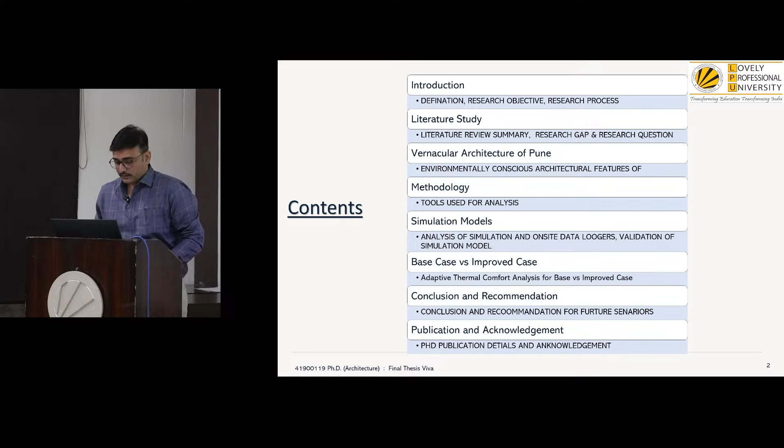Topic for the introduction: India had about 31% of population living in urban areas in 2010, and by 2050 that percentage is projected to rise up to 50%, adding 441 million more people to the urban population. At the same time, the demand for housing is also growing simultaneously, making it necessary to think about the housing strategies needed.

Pune, located in Maharashtra, is also facing rising temperatures. An article published by The Hindu, 'Climate change is already making India hotter', states that from 1950 to 1990 the temperature rise observed was about 0.39 to 0.52 degrees Celsius, raising serious concern. A report published by TERI, The Energy and Resources Institute, in 2014 stated that by 2030 the rising temperature will be 1 to 1.7 degrees Celsius, and it will go up to 3 degrees Celsius by 2070.

Considering that, and also observing that Maharashtra is facing housing demand, it is the need of the hour to study passive design strategies, which makes this study more reliable for further investigation. For investigation, we studied the Pune climatic zone.

Considering Köppen's climatic classification, Pune stands with the tropical savanna climate, categorized with hot summers, distinct monsoon seasons, and mild dry winters. In summer, the temperature ranges up to 37 degrees Celsius with humidity 36 to 50%. In monsoon, temperature varies from 24 to 30 degrees Celsius, with humidity high up to 82%. In winter, average temperature is about 21 to 25 degrees Celsius with moderate humidity.

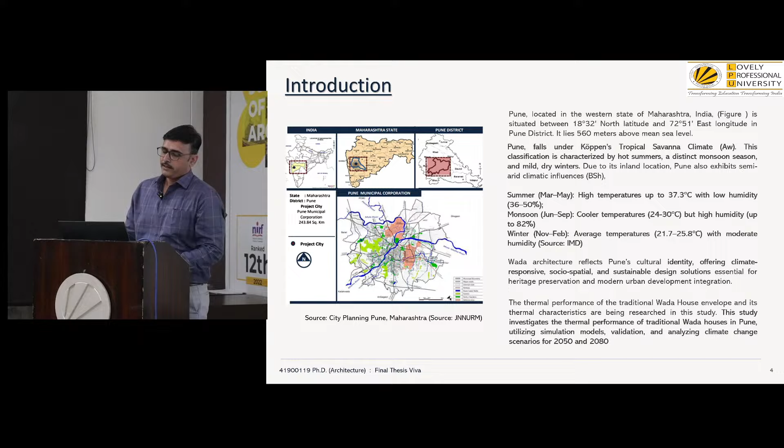Research flow: research started with the research design with seasonal climate variations to understand rising temperatures in the region. The literature studied covers main topics like thermal characteristics, climate change resilience, and future climate change scenarios.

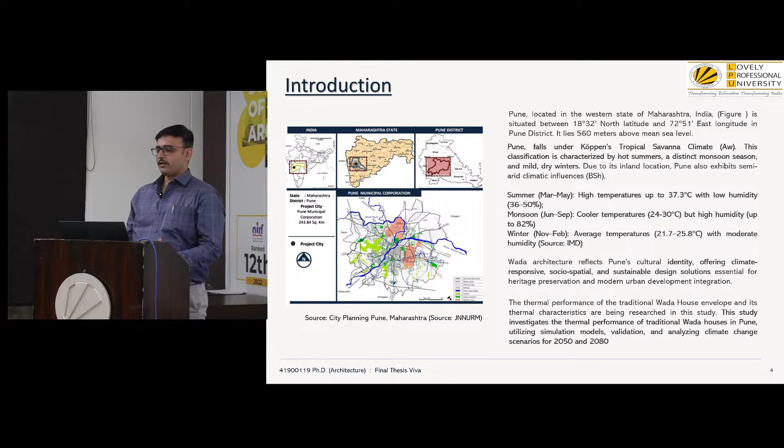On this basis, we framed our research questions, research objectives, and scope and limitations. We investigated the vernacular architecture forms of Pune region with respect to passive design strategies, Wada layouts, case studies, and sample size selection. For research methodology, it is divided into three categories.

First, to identify the rising temperature of Pune, then to relate it with the vernacular house form. Second, for validation of the simulation, we installed data loggers to understand real-time scenarios in the Wadas. Third, utilizing climate change scenarios developed by the Intergovernmental Panel on Climate Change, we described future weather scenarios for 2050 and 2080, through which we did the improved case simulation models.

Result analysis: with the rising temperature, we studied the 30-year temperature variation using IMD weather data. Second, weather simulations for the base case, which we validated with ASHRAE guidelines. Then future simulations to understand future scenarios of these buildings and propose new strategies based on the improved case model. On this basis, we derived the conclusion and recommendations.

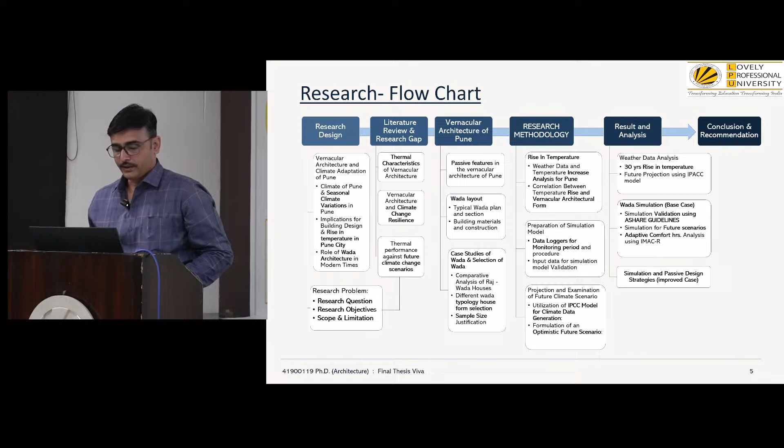Literature review and the research gap. For literature review, we mainly focus on thermal characteristics of vernacular architecture, climate responsive vernacular architecture as bioclimatic design and its resilience to climate change, and thermal performance in future climate change scenarios.

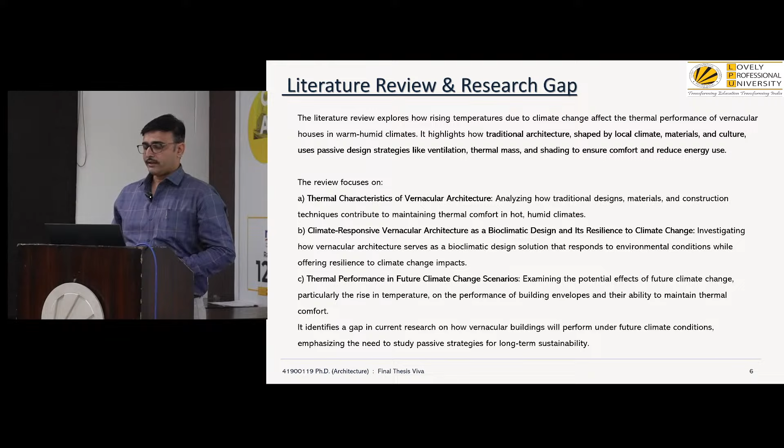In category one, thermal characteristics, we discuss quantitative simulation analytics, qualitative and comparative design. We found that despite a 12-degree outdoor temperature fluctuation, the indoor stayed between 26 to 30 degrees Celsius. The courtyard was 5 degrees cooler than outside, indoor and relative humidity remained stable.

Second, an important finding from user surveys: occupants in traditional homes reported greater thermal comfort, with temperature readings showing 2 to 3 degrees Celsius higher comfort than modern buildings.

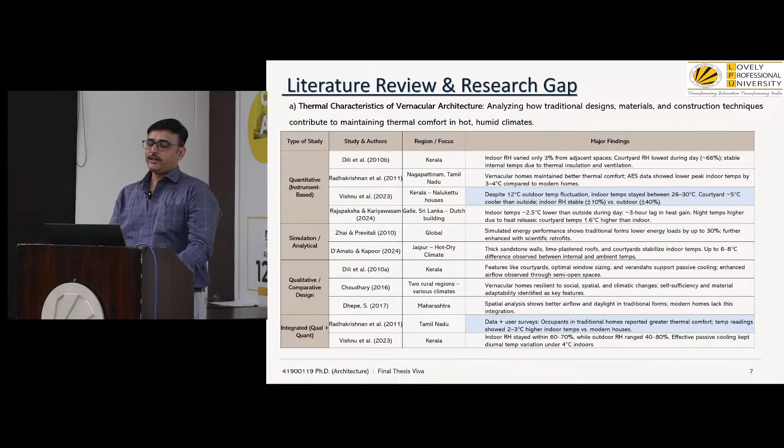Second, climate responsive vernacular architecture as a bioclimatic design and its resilience to climate change. We observed that mud walls with thatch roof show high energy efficiency, high thermal mass, and ventilation enhanced comfort. Passive solar heating and thermal mass regulate temperature. Vernacular forms efficiently use natural resources year around.

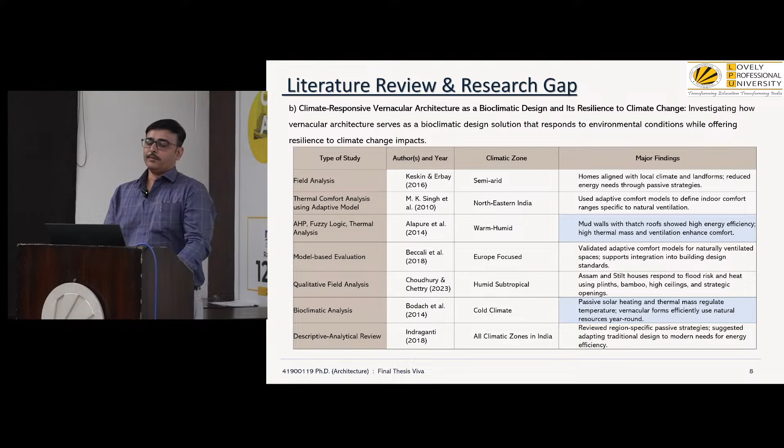Third, thermal performance in future climate change scenarios. We observed climate change scenarios for different zones like Pune, Hong Kong, China, and Ahmedabad, where remote sensing and urban heating analysis was done for Pune only, stating that from 1990 to 2019, the built-up area increased by 43%. Summer land surface temperature increased by 5.8%, and a 12.4 urban-rural land surface temperature gap was identified.

Now, based on the field investigation, author Khadija stated that vernacular homes maintain 23 to 31 degree indoor temperatures across climate zones, outperforming RCC homes in future scenarios as well. High thermal mass plus a controlled heat flow system raises indoor air temperature passively, with no mechanical heating required. And finally, cooling hours account for 60% of the heating period, and 33% under high greenhouse emission scenarios.

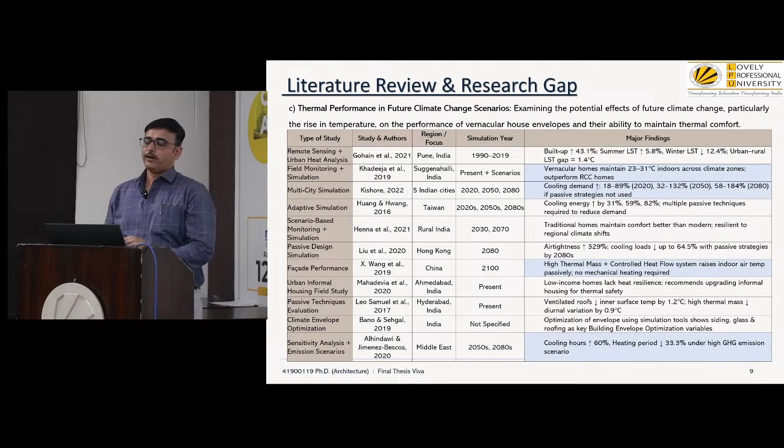When we got a review from the expert, it was stated that we have to discuss one more category: what are the different climate zone scenarios in the vernacular architecture of Indian context. So we have discussed this with the help of different zones.

What are the different passive strategies and major findings? I am covering the important ones. Dili, discussing the tropical climate of Kerala, it shows that courtyard, shaded veranda, and pitch roof give a 3 to 4 degrees Celsius reduction in indoor temperature compared to outdoor, while also maintaining indoor humidity. Rajapaksha, in her paper, says that high thermal mass walls with night ventilation give 2.5 degrees below outdoor temperatures and heat retention at night.

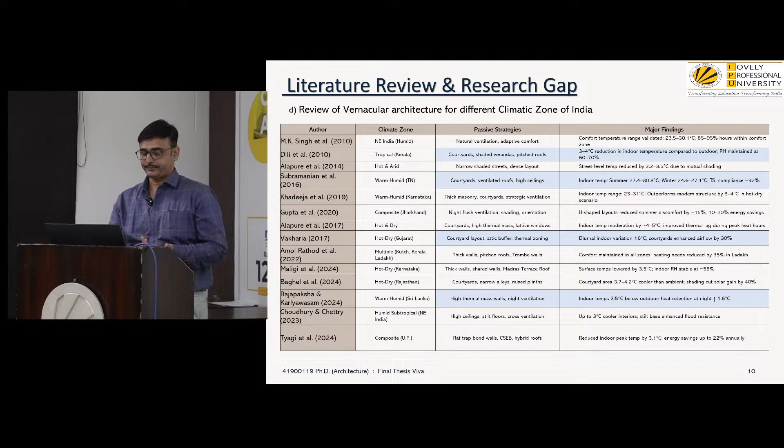Now, the research gap. While existing research mainly discusses climate responsive strategies, energy optimization, climate resilient housing, and vernacular architecture, the existing studies on warm humid vernacular houses do not address the impact of climate change and temperature rise on Pune's architecture. Climate change and rising temperature challenge the resilience of vernacular architecture, while Wada houses in Pune have traditionally offered thermal comfort through passive design. Their future effectiveness is uncertain.

This study assesses the performance under projected climate scenarios for 2050 and 2080 to identify vulnerabilities and proposes adaptive strategies. The aim is to derive insights from vernacular design that can inform modern architecture by bridging traditional wisdom with contemporary needs. The research will also offer recommendations for climate resilient, energy efficient buildings.

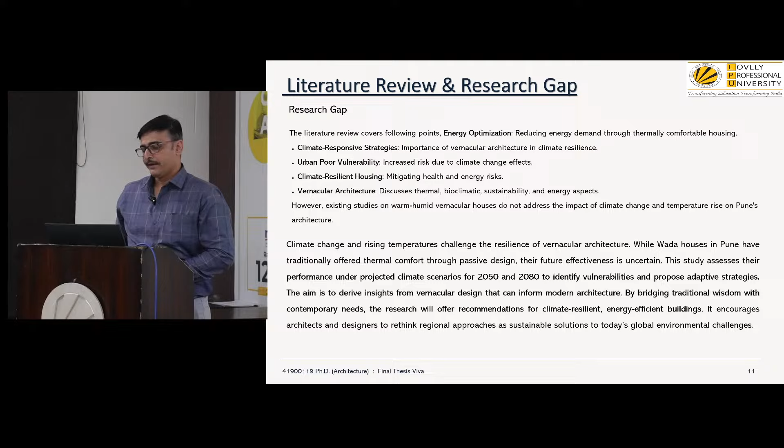Based on the gap, we frame the research question: what are the implications of rising temperature on the vernacular house form of the Pune region? The objectives are to analyze the nature of climate change and its impact on vernacular architecture for future scenarios considering rising temperature in Pune; to assess and compare the thermal performance of traditional Wada houses and their improved climate responsive strategies through simulation under future climatic scenarios; and third, to develop practical guidelines for modifying the Vadas to improve thermal comfort while preserving their traditional architectural character.

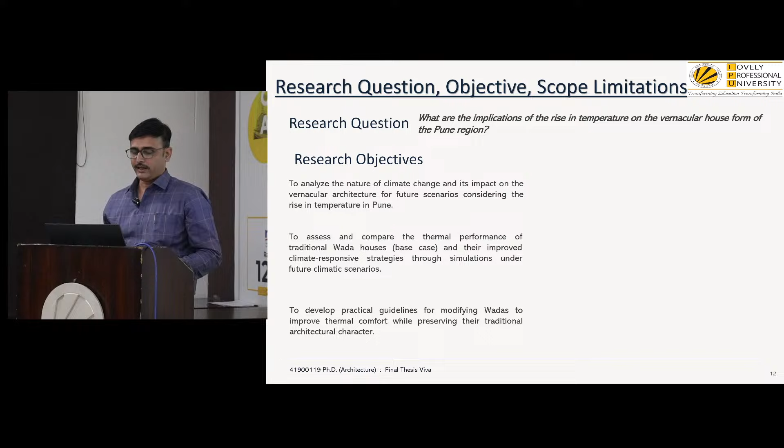Scope and limitations: the study mainly focuses on analyzing the thermal characteristics of a Vada house envelope in Pune's climate context and evaluating the effectiveness of passive design features in maintaining thermal comfort. The assessment is done for the impact of future climate scenarios for 2050 and 2080 on Vada houses with respect to rising temperature. The limitations are that the study is limited to thermal performance of Vada architecture only, excluding urban variables, and for rising temperature, the data used is based on IMD weather data only.

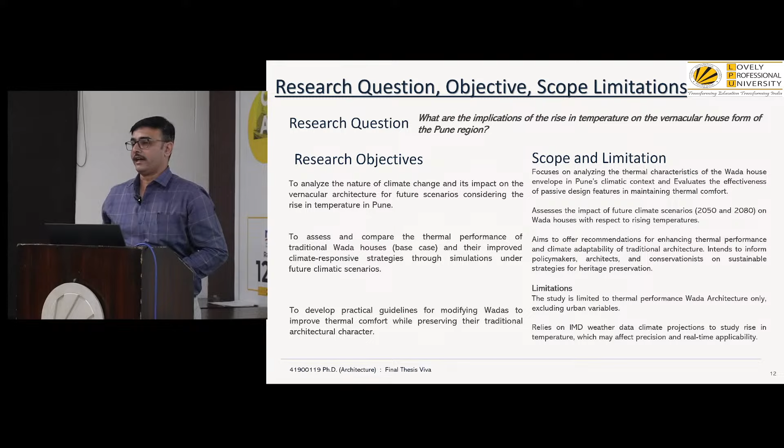Now, vernacular architecture of Pune. The vernacular architecture of Pune, mainly called Wada, is derived from the Sanskrit word Vata, meaning a plot of land or a piece of land. There are two types of Vada: one with two courtyards, one with a front yard or rear yard, and one at the center. The Vada typologies are mainly discussed when we identify which type of Vada we are dealing with. The Wada with two courtyards, the Rajwada, is the type mainly found in frontal areas.

In frontal areas, we observe public and semi-public activities, whereas in a rear yard we can observe activity for the family, which is restricted to family members only.

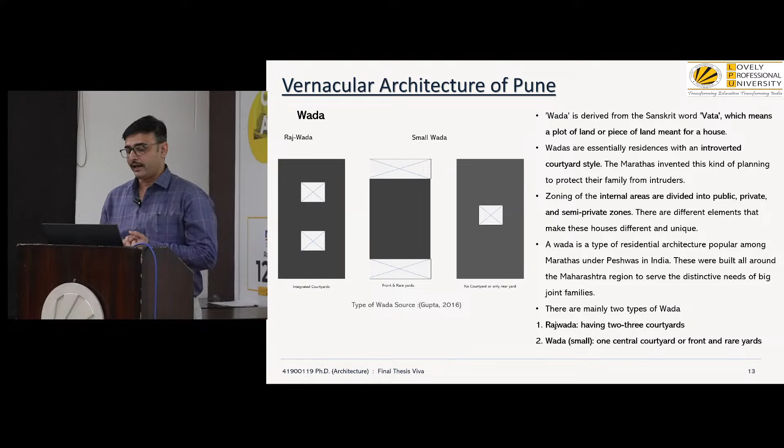The courtyard, which was introvertly designed, has the main source of light and ventilation for these Vadas, because these Vadas were mainly designed to defend themselves when intruders attacked, a philosophy developed during the Mughal and Maratha periods. The main characteristics are courtyards with verandas, terraces, attic spaces, and thicker wall sections which provide thermal mass.

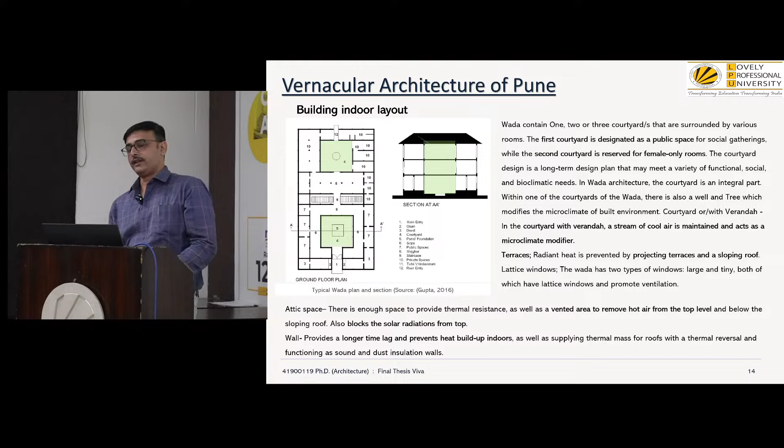Based on this, for the finalization of Rajvadas, we first selected 5 Rajvadas: Vishrambag Vada, Ranade Vada, Chafekar Vada, Nagarkar Vada, and Thakur Vada.

We defined the orientation, structure, plan form, construction type, number of floors, passive design strategies, and types of doors and windows. We also discussed floor and roof forms, front elevations, and whether renovation was done, because we need the originality of the form when analyzing these structures, along with courtyard proportions and the built-up area.

On this basis, we selected the Ranade Vada for further analysis. It was selected because no renovation has been done in this particular Vada. At the same time, this Vada has been occupied by the same occupants for the last 30 years, so it functions as a house form while maintaining the characteristics of the vernacular form.

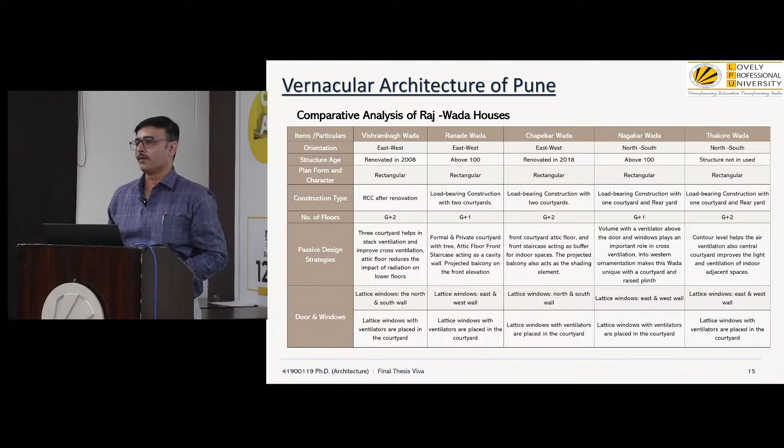While dealing with one typology of Vadas, we thought we should add 2 more smaller Vadas to have a comparative analysis of all 3, making this study more reliable. When we discussed this with experts, their comment was that we can't say how Vadas are performing with just one example — you need different Vada scales.

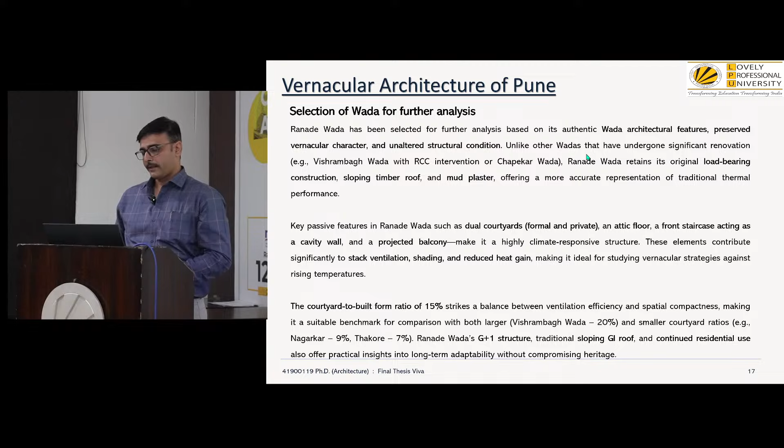Ranade Vada has 2 courtyards; it's a G+1 structure with an attic. Purandar Vada is a small Vada with a rear yard and front yard with attic space. Gokhale Vada doesn't have any front yard, instead having a front access and a rear yard. This is the only G+2 structure that we found.

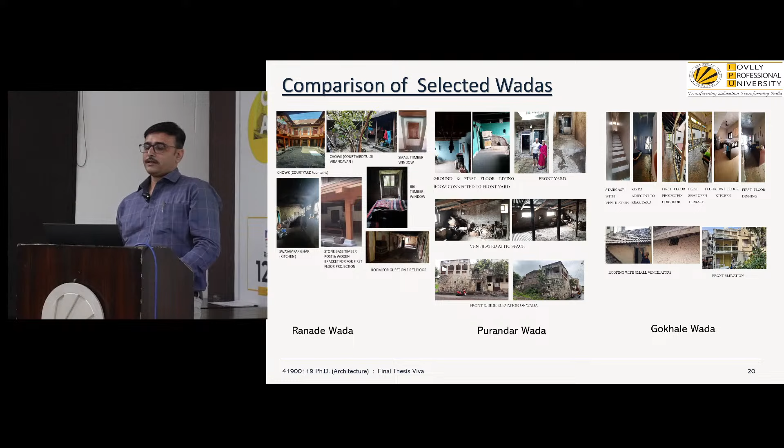While studying in detail, we found that all these Vadas are 100+ years old, maintaining the vernacular character with no change. All three Vadas are load-bearing structures with the typical characteristics of the Vada — lattice windows, roof form, and most importantly, projected balconies.

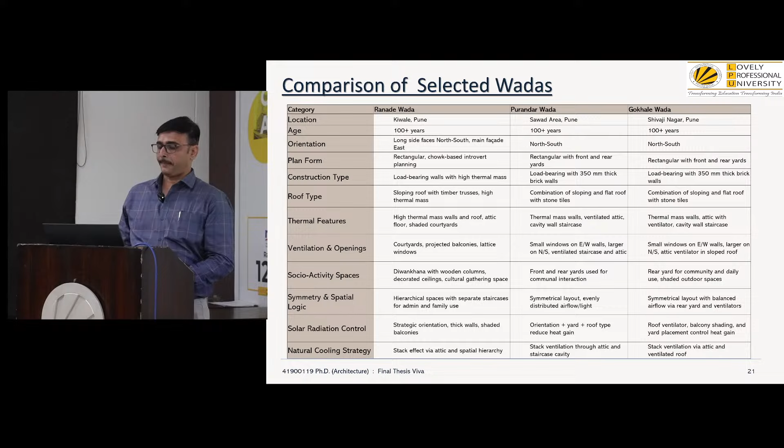To justify the sample size, we found that all three Vadas have the main characteristics of the Vada, standing with vernacular details. By analyzing multiple case studies with similar yet distinct features, the research ensures triangulation, enhancing the validity and reliability of the findings.

The sample size is also justified by the need to evaluate both existing base case and improved case scenarios. To add more contrasting character, two more Vadas, Purandar and Gokhale Vada, were added to make this study more impactful.

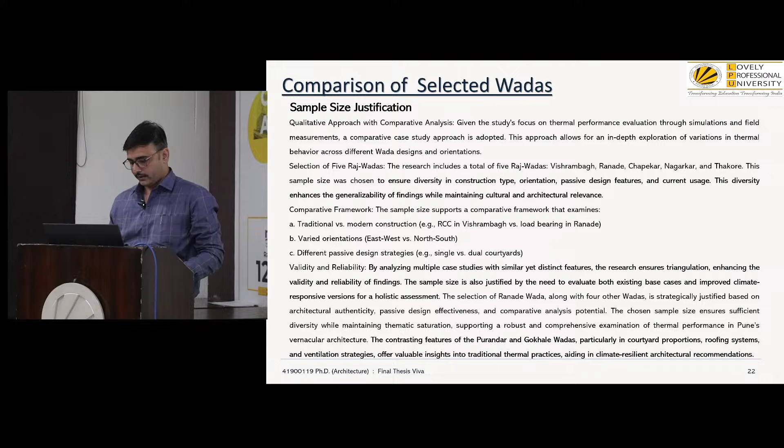Research methodology: we started with the different steps we had to perform to achieve objective 1, objective 2, and objective 3.

In objective 1, we started with a literature review, then visited various vernacular sites in Pune to identify the vernacular Vada house forms and their selection criteria.

We also needed to understand the rising temperature in the current quarters, so we visited the IMD weather department to get data for minimum and maximum monthly temperature ranges, to identify the thermal temperature variation. We then discussed bioclimatic analysis using Climate Consultant to understand the key strategies important for going further.

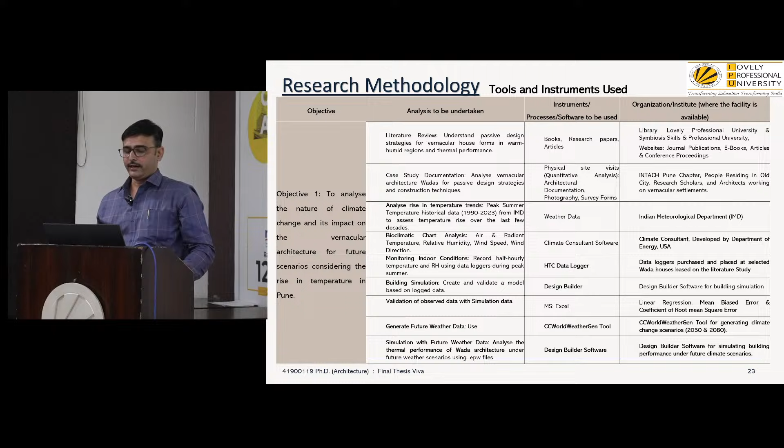Then, for a simulation model, we placed data loggers in all three Vadas to understand real-time scenarios, and validated these models with ASHRAE guidelines. We then generated future weather data with the help of a climate model developed by the Intergovernmental Panel on Climate Change, and finally performed the analysis for this case.

Under objective 2, we mainly discussed improved strategies with the Climate Consultant tool, and incorporated these guidelines into the simulation model to develop the improved case.

For objective 3, we proposed recommendations for what retrofitting strategies should be adopted for this particular house.

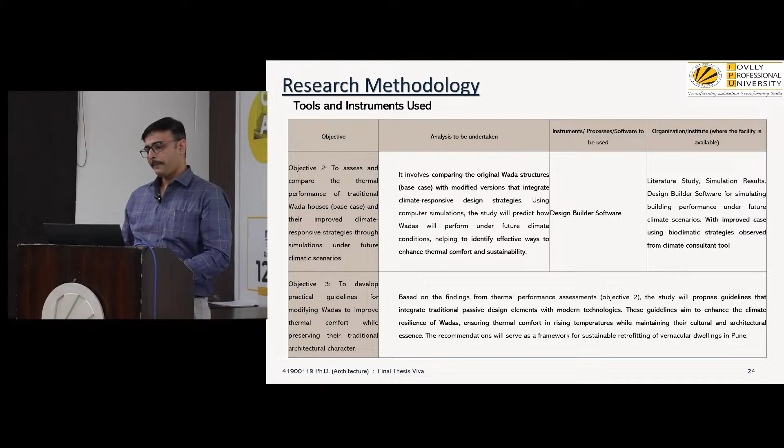Step 1: study with the rising temperature. For this, we have gone through 30 years of data from the 1990s to 2023, where we have discussed the peak summer temperature, average summer temperature, and the overall temperature ranges. We have found that there is an increase in temperature, which states that by 2023 the rising temperature is around 1.5 degrees Celsius. This is also discussed by various studies which stated that by 2013 to 2014 there is a rising temperature.

So we have understood there is a rising temperature and we need to go for those ideas for the climate change scenarios. Now, for the future climate change scenarios, we have created weather data files with the help of an Excel-based tool. This Excel-based tool is generated by IPCC HadCM3 models. In the figure, you can see this tool.

This is a CCWorldWeatherGen tool where we have to place the actual weather data file, and we have to give the climate change scenarios based on the IPCC. So we have given the scenarios, and through morphing we have generated the weather data file for 2050 and 2080. For 2050 and 2080 we got readings for the outdoor dry bulb temperature, minimum and maximum monthly temperatures, and the monthly minimum temperature in degrees Celsius.

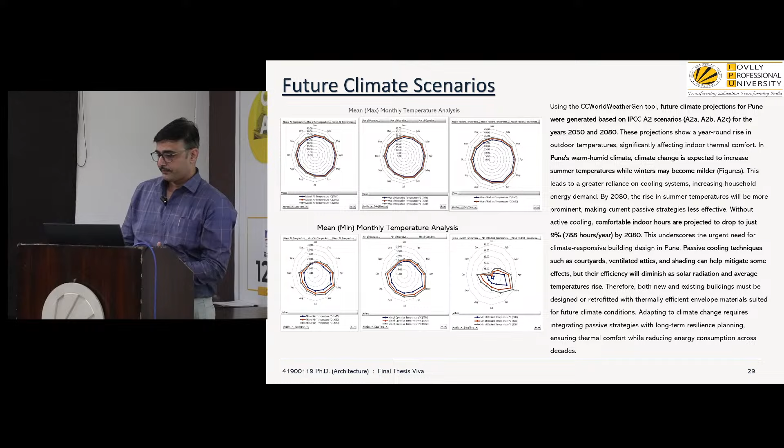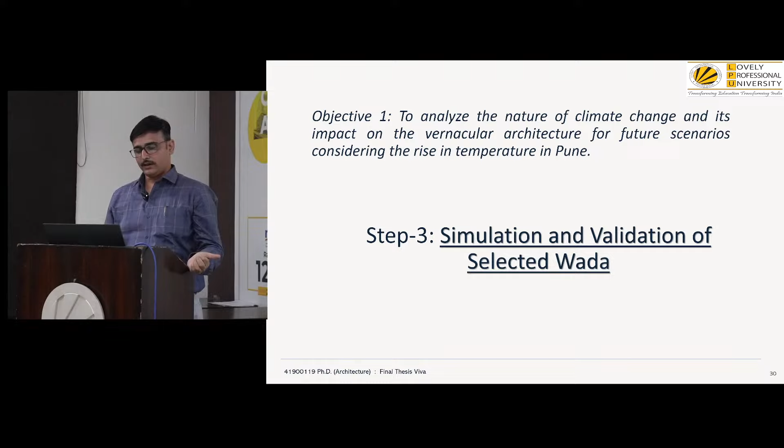Now, step 3: simulation and validation for the selected Wada. We have placed STC data loggers in all 3 house forms. The data recordings are done for the Ranade Wada from April 22 to March 23, whereas the readings for Gokhale Wada and Purandar Wada were done for 1 week. For Gokhale Wada, 25th Jan to 2nd of Feb, and 5th of Feb to 14th of Feb.

So we measure the half-hourly air temperature and humidity. These are some of the readings which we got for the Ranade Wada. The Ranade Wada reading says that the indoor temperature is very aligned with the outdoor temperature, but with very minimum variations.

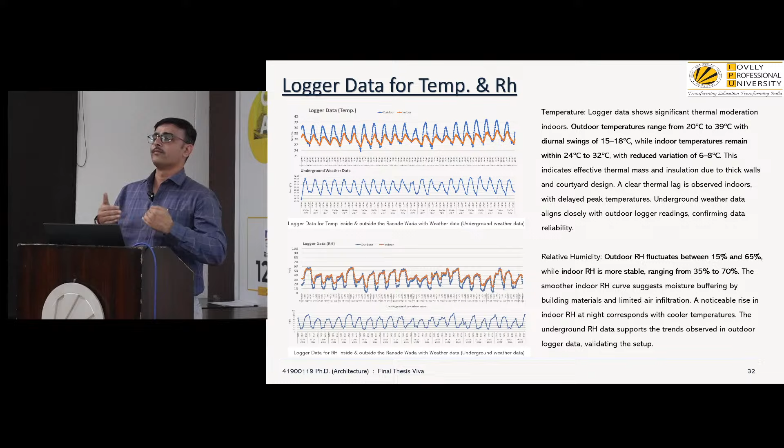The outdoor temperature which we have observed has a 15 to 18 degree swing, but at the same time indoor has only 6 to 8 degrees. Humidity is also a kind of factor we have observed that doesn't have that kind of impact on the Wadas. But at the same time, the data also matches with the Underground weather data. So we have identified that the temperature and humidity which we got from the data loggers are very much syncing with the outdoor weather data which we are getting through underground.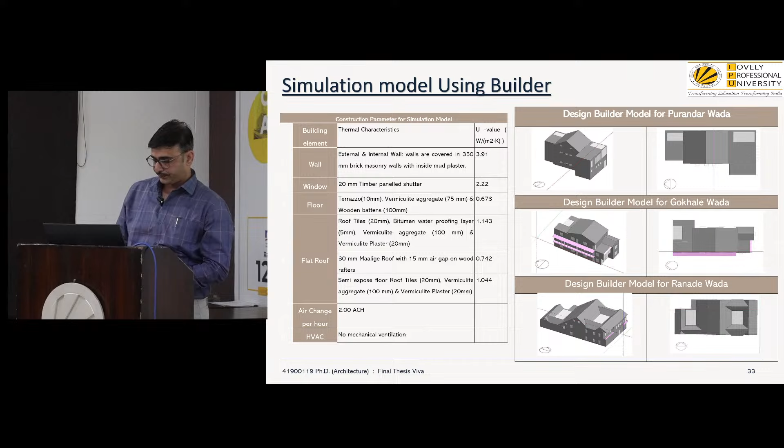Now, for the simulation validation, we have discussed the ASHRAE guidelines, where we have 2 types of errors to find out. One is the mean bias error, and second is the coefficient of variation of the root mean square error. In ASHRAE, it gives a clear idea: if you are doing monthly calibration, the mean bias error should be plus minus 5%, and if hourly calibration, it should be 10. For the coefficient of variation root mean square error, it should be 15 for monthly and 30 for hourly.

So on the basis of this, we have observed the data for the Ranade Wada for the whole year. We can easily see both conditions are being met, and this model is fit for further studies.

At the same time, we have also observed the mean bias error is around 4.3%, and the CV RMSE is around 11.76%, which is also lying within the range of ASHRAE. Because when we consider hourly data, both models are fit for further studies.

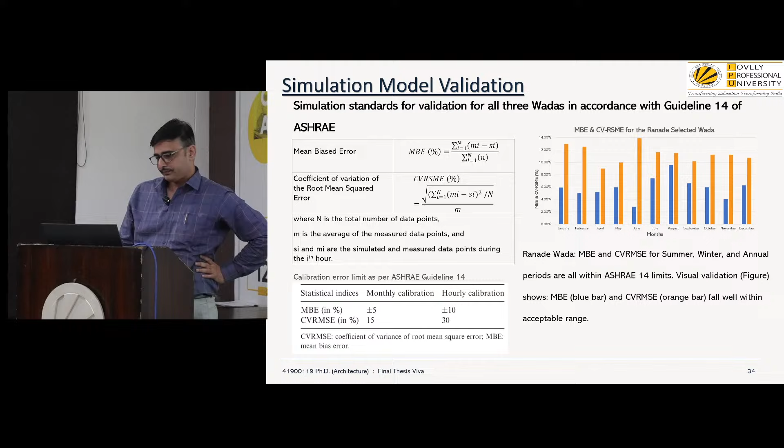Now, step 4, we are going for the further detailed analysis for all these 3 Wadas. First is the Purandar Wada.

The ground floor during peak summer, indoor temperature reaches a maximum up to 35 to 37 degrees Celsius, while in winter it drops to 15 to 17 degrees Celsius. Whereas the upper floor, the maximum temperature, particularly in the attic, reaches up to 37 to 39 degrees Celsius in peak summer, while other rooms experience a slightly lower temperature, in the range of 34 to 37 degrees Celsius.

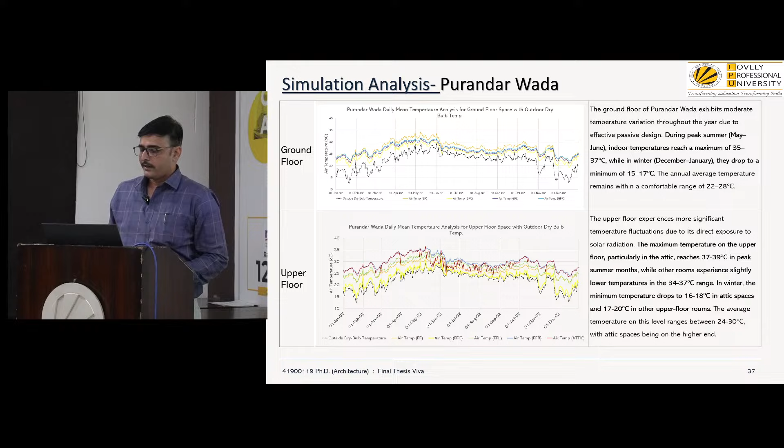In the winter, the minimum temperature observed is 16 to 18 degrees Celsius. For the Gokhale Wada, the ground floor reaches approximately 34 to 36 degrees Celsius, while in winter it goes to 15 to 17 degrees Celsius. For the upper floors, 36 to 38 degrees Celsius, and for winters it's 17 to 20 degrees Celsius.

For Ranade Wada, it's approximately 35 to 37 degrees for the ground floor in summer and 15 to 17 in winter. For upper floors, it goes from 36 to 39 degrees Celsius, and for winter it's 16 to 18 degrees Celsius.

So by analyzing all these things, we can easily state that ground floor maximum temperature is in a range from 35 to 37 degrees Celsius, whereas ground floor minimum temperature we can say is 15 to 17 degrees Celsius.

Ground floor observations for Purandar Wada show moderate variation due to passive design. Thermally, the ground floor is more stable than upper floors for the Gokhale Vada, and the Ranade Vada is more stable due to two courtyards and effective ventilation. For upper floors, due to the attic, it goes to 24 to 30 degrees Celsius average temperature for all three cases.

For the upper floor remarks, there are significant fluctuations due to the attic floors. Considering this, the courtyard effect is significant, particularly in Ranade Wada, where two courtyards enhance air circulation, reducing indoor temperature by 3 to 4 degrees Celsius.

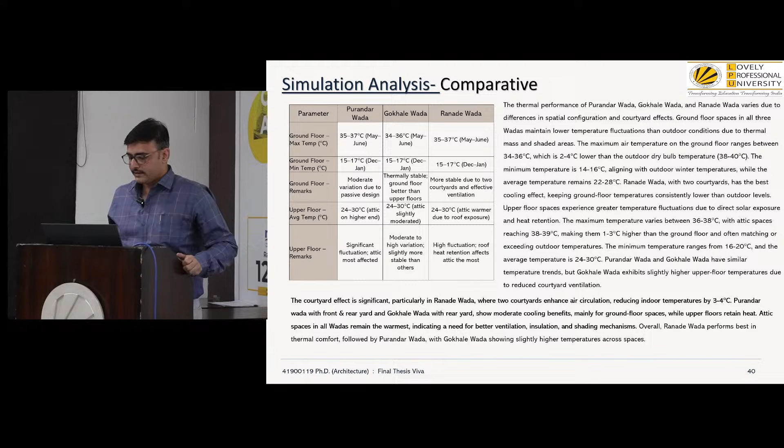Now, to quantify these things which we discussed in terms of temperature, we have also discussed in terms of comfort hours. For the comfort hours, we have done the hourly analysis on the basis of IMAC-R, which stands for Indian Model for Adaptive Comfort for Residential Buildings.

In this model, we can easily state that this model is derived by Professor Rajan Rawal in 2022, which gives acceptability limits for 80% and 90% of people. So, with the neutral temperature, we can get the 90% acceptability and 80% acceptability.

The equation we studied is: neutral temperature equals 0.42 times the outdoor temperature with a 30-day running mean, plus 17.60. On the basis of this, we have derived the temperature limits with respect to 90% and 80%. So if we see, this is the line where we are getting the neutral temperature.

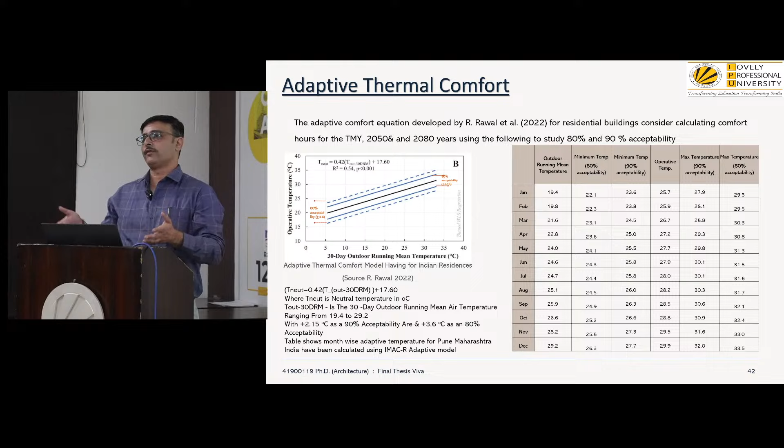With 90% acceptability, for January it's 23.6 to 27.9 degrees where people will feel comfortable. For 80% acceptability, we find 22.1 to 29.5 degrees, which is the range where 80% of people will feel comfortable. By analyzing this data, we found that early April, May and June are suffering more in terms of comfortable hours for 2050 and 2080.

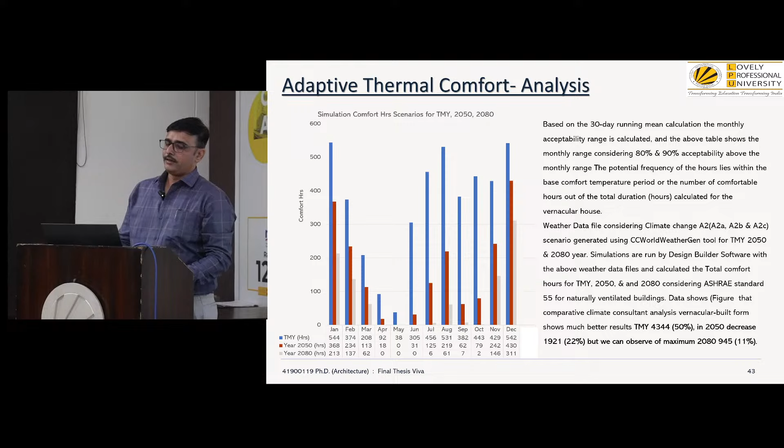Now we have done the analysis for Wadas on the basis of ground floor and upper floor spaces.

This graph which we have created has three main parameters. First is the space: ground floor, first floor, ground floor courtyard, first floor courtyard, ground floor living and first floor living, for three different scenarios. First is the present scenario, second is 2050, and third is 2080.

In this we can easily observe we are seeing a drop in comfortable hours going into the future scenarios. Mainly in the months of May, June and July, we are finding the minimum comfortable hours in the 2050 and 2080 scenarios. For the upper floor, we find it is much less compared to the ground floor, where we are getting 7,406 yearly comfort hours.

We are getting hardly 6,366 hours for the upper floors for the Purandar Wada. For the Gokhale Vada, we have observed a similar trend, but in this case the drop in comfort hours is more pronounced for the future scenarios, where we can easily find the first floor living space is affected.

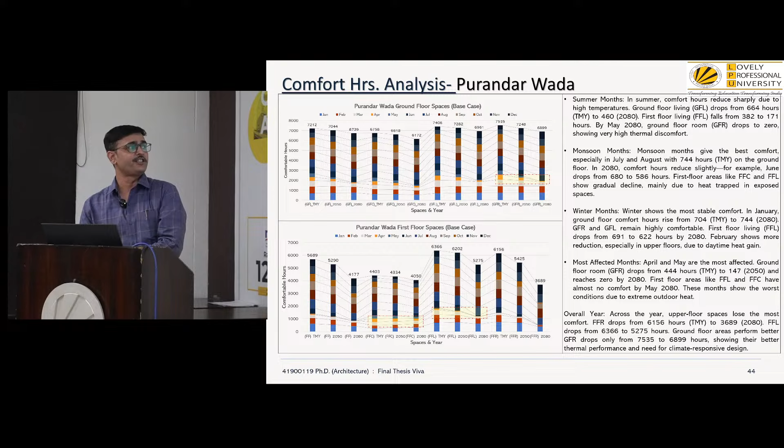It's having 5,668 hours as comfortable hours, dropping to 3,334, almost half, we can say. So this is what we are getting with the Gokhale Vada, which needs interventions.

For Ranade Vada, we are also finding difficulty with the upper floors, but in this case the ground floor is very much in align with the comfort hours without any significant change in terms of climate change scenarios, whereas the upper floors have a very declining scenario.

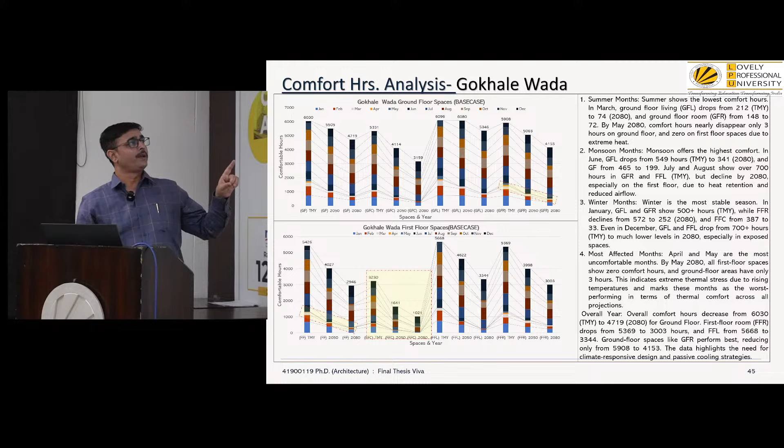So when we are comparing, for Purandar Wada it's dropping from 4.5% to 9.4% for future scenarios 2050 and 2080. For Gokhale, which we have seen, it increased from 8% to 16% for 2050 and 2080, and for Ranade Vada it is 4.5% to 8.6%.

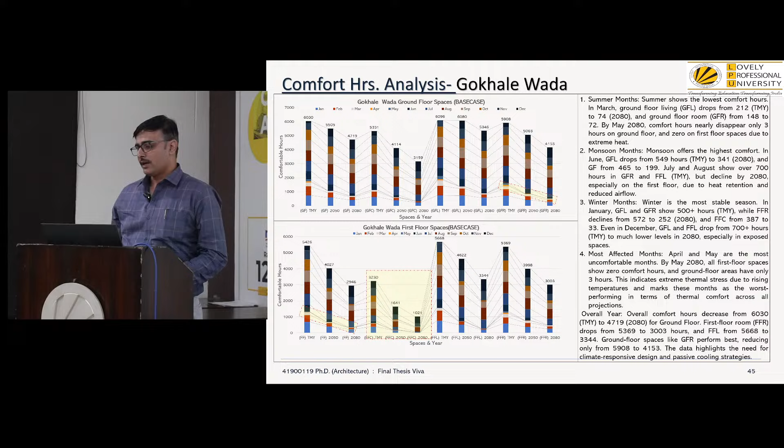Now, based on this, when we have derived the base case, we are moving for the improved case strategies. For the improved case, we have dealt with the climate consultant tool to identify the comfort strategies for the future scenarios.

We stated the thermal mass effectiveness, solar heat gain control, ventilation and airflow management, roof and wall insulation, and dehumidification. By integrating this, we converted it into scenarios for the external wall and the flat roof.

We have added 75mm insulation to make it more stable. For internal walls, we actually converted the U value, which is quite higher, with the help of AAC blocks.

Then for the pitch roof, we have added reflective clay tiles and insulation materials. But to maintain the character of the vada, we have not changed the plaster type. The plaster which we have kept is the vernacular plaster, so as not to deviate from the actual vernacular features of the house.

We also added air change. Earlier it was 3 air changes per hour; now it's 5 air changes per hour. We have added dehumidification because in the monsoon we are finding a rise in humidity levels. To mitigate this through climate consultant, we found that if we add dehumidification, we can get more comfortable hours.

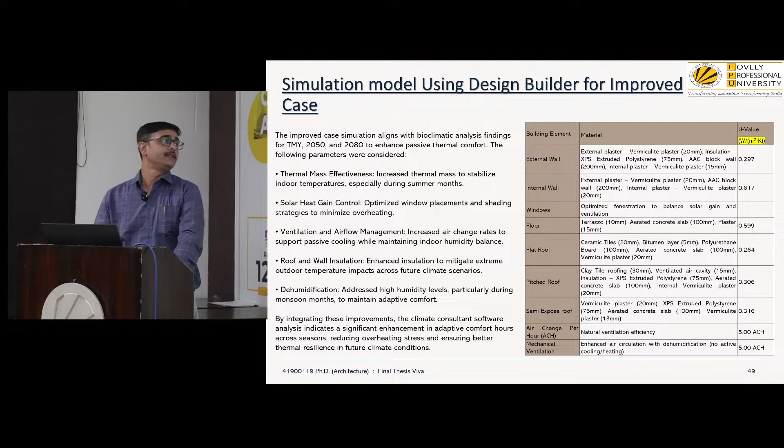By using this approach, we are not adding any heating and cooling strategies in our simulation model. On this basis, we can see the increase in comfort hours for the 2080 and 2050 scenarios for the upper floor as well, for all 3 cases.

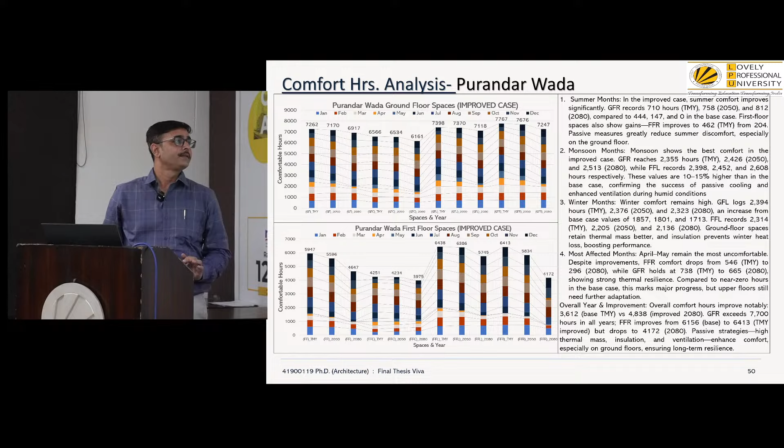So by doing this, we have identified that there is an increase in comfort hours for the improved case. Earlier we were getting 12,901 overall comfortable hours for all the spaces, which increased to 13,209. So we can say the Gokhale Vada, which had very few comfortable hours for the upper floors, gets much higher comfort while adding those strategies.

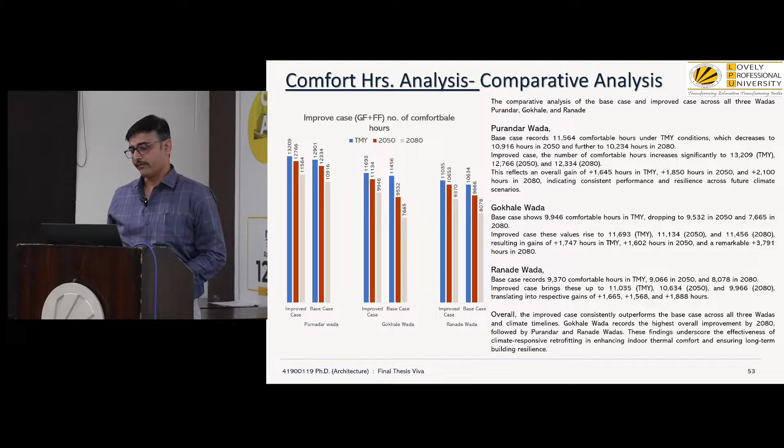Objective recommendations: on the basis of climate consultant and the design builder improved version, we discussed future strategies based on thermal mass optimization and insulation, where we added the insulation layer and replaced the normal brick walls with AAC block.

Then roof insulation and passive heat dissipation: we added reflective materials in attics to reduce internal heat buildup. For improved ventilation and airflow, we improved the air change value to 5. For monsoon dehumidification, we added dehumidification, which mainly increases comfort hours in Gokhale Vada and Ranade Vada.

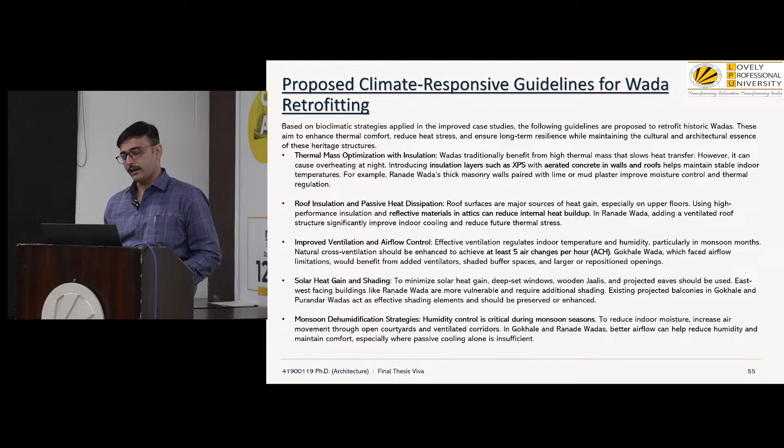These are some sketches through which we discussed the strategies. The first is thermal mass and insulation integration, where we placed the external and internal vernacular plasters only, and added insulation with XPS 75mm.

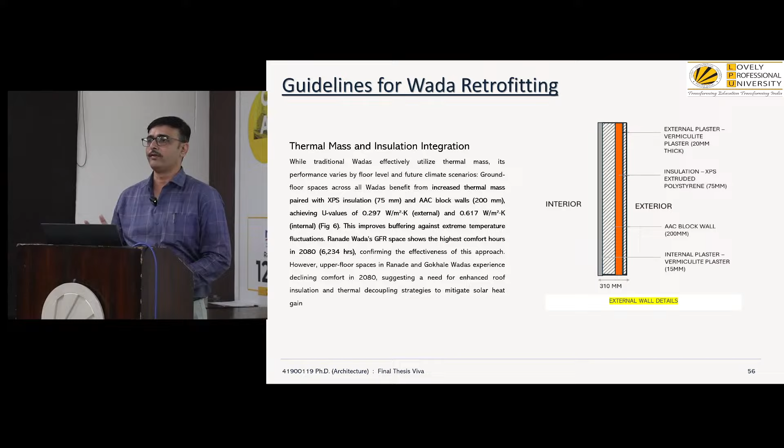We also replaced the brick material with AAC blocks, and at the same time got a thinner section than the actual one. The actual section was 350mm; now we are getting only 310mm.

For roofing, we added clay tiles with reflective properties to decrease the solar radiation impact on the building form. We also added an air cavity in between the insulation, so we don't have direct heat transfer, and we can have improved ventilation rate also.

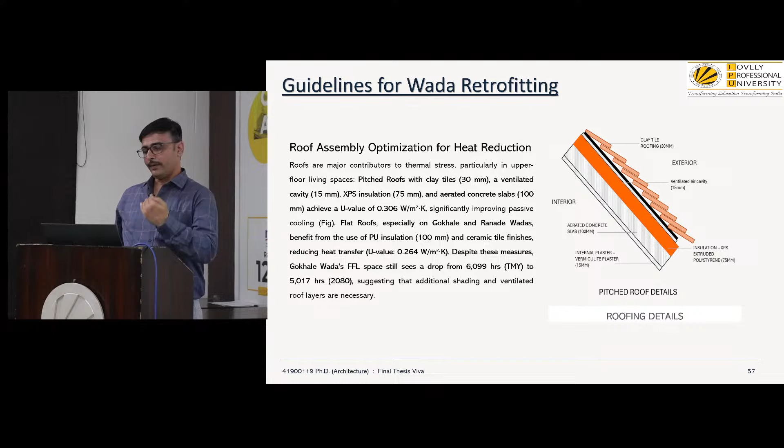At the same time, we replaced the traditional roofing style with an aerated concrete slab to reduce the weight of the slab, as well as to achieve a good U value.

Further, through these strategies, we placed vents in the attic spaces to improve stack ventilation in the Wadas. This increases the ventilation rate within the building site.

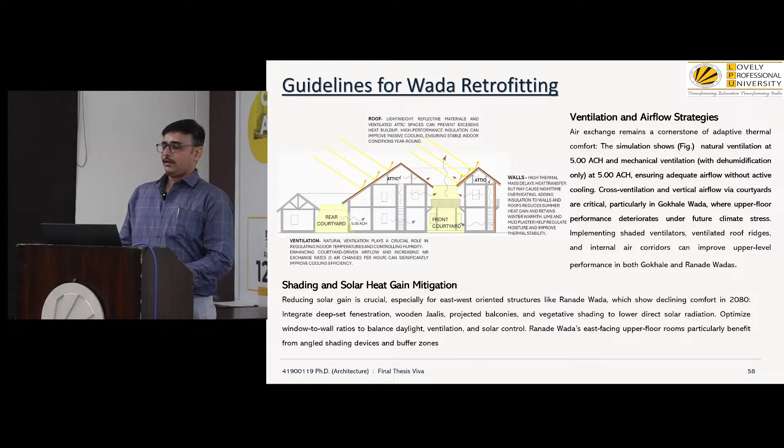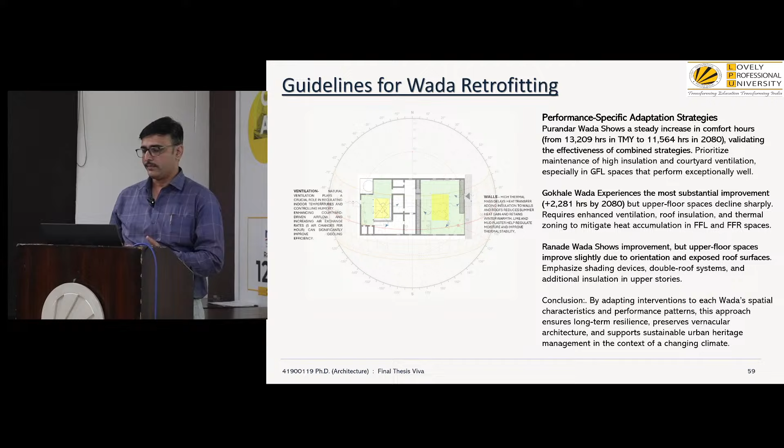With this, we've gone through a conclusion: though there is a rise in temperature by 2080, Wadas were traditionally designed to provide thermal comfort in Pune's climate by integrating elements like deep-set windows, wooden jalis, screens, projected balconies and internal courtyards. These features help regulate indoor temperature by promoting cross ventilation and reducing direct heating.

Key findings of the research show that while Wadas inherently possess climate adaptive features, they require targeted enhancement to sustain their thermal efficiency, as discussed in the improved case. The study compared base case Wadas with climate responsive retrofitting strategies under future temperature projections for 2050 and 2080. Results reveal a decline in passive cooling effectiveness due to increasing outdoor temperature, requiring additional interventions.

In the improved case, Purandar Wada demonstrates the highest stability across all seasons with effective ventilation and insulation maintaining indoor comfort. Gokhale Wada, while benefiting from thermal mass improvement, exhibits overheating issues in upper floors due to restricted airflow. Ranade Wada faced the most significant heat gain challenge, particularly in attic spaces, due to insufficient roof insulation and shading management. Without interventions, adaptive comfort is projected to decrease from 50% to 22%, and up to 11% in 2080.

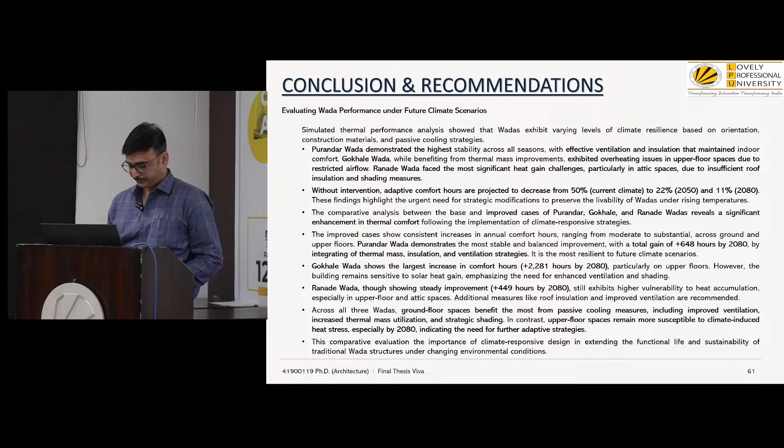Some recommendations for future design include enhancing passive cooling for future climatic resilience by improving U values, advanced roof and wall insulation techniques, adaptive fenestration and dynamic shading systems, optimized ventilation, and hybrid cooling systems.

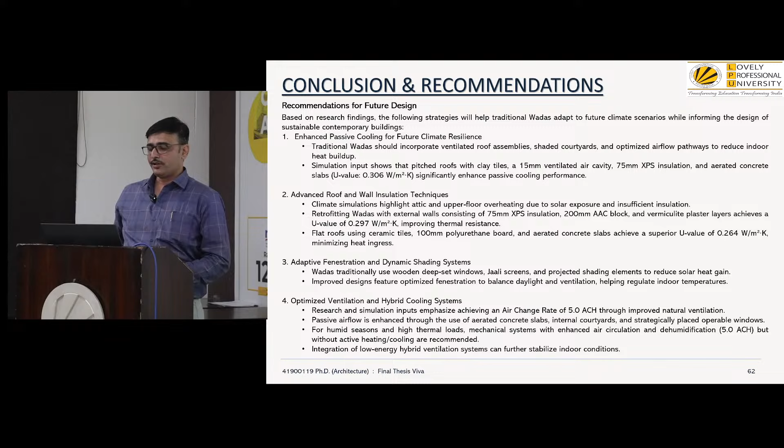Recommendations for architects: integrate passive cooling features like courtyards, shading devices and ventilated roofs from Wada architecture into new designs. Use climate simulation tools to assess future thermal performance. Specify materials with low U values. Use breathable climate responsive materials such as lime plaster. Plan interior layouts to enhance natural ventilation and reduce heat retention.

Incorporate vernacular shading elements. For government agencies, incentives should be introduced for retrofitting heritage structures with passive design upgrades. Integrate green infrastructure and passive cooling into urban planning policies. Mandate climate performance assessment for new development.

For architectural institutions: include climate adaptive vernacular design and simulation tools in curriculum. Promote research and studios focused on retrofitting heritage buildings. Collaborate with local authorities for field-based conservation and climate resilience projects.

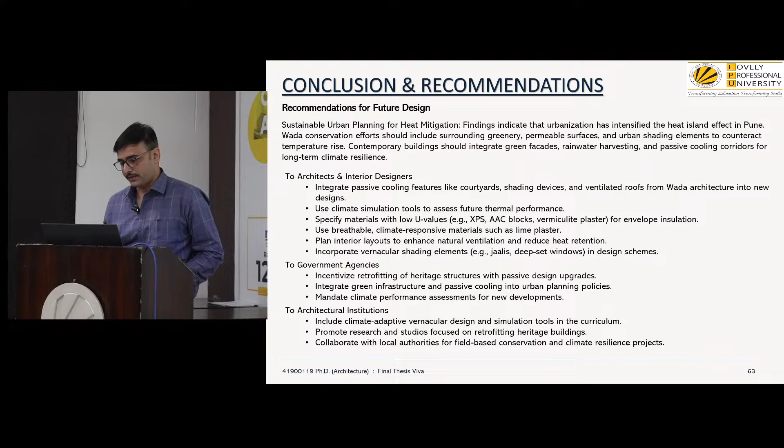Further research can be done on the performance of retrofitted Wadas in terms of energy efficiency under future climate change scenarios, the impact of urban heat island effect on Wada neighborhoods with suggested environmental improvements, and reviewing the effectiveness of natural daylight and ventilation features as outdoor temperature and humidity increase.

For contemporary residential buildings: analyze the impact of passive design and insulation on energy efficiency under future climate scenarios. Assess how building layouts and materials contribute to urban heat island effect and suggest alternative designs to reduce it. Review the performance of daylight and natural ventilation strategies in modern homes as climate conditions change. Understand how residents respond to climate adaptive features in new housing for better user-focused design.

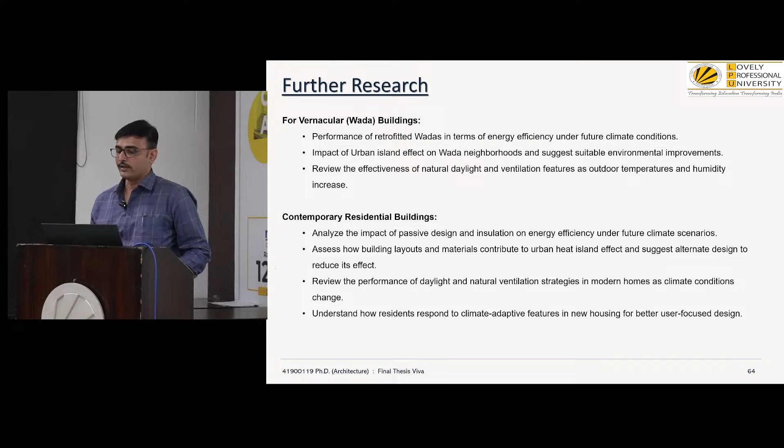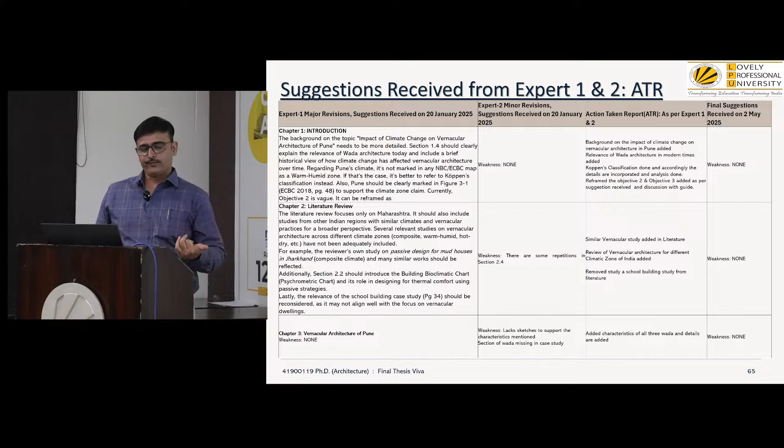These are the changes we made for our final submission based on feedback from reviewer 1 and reviewer 2. So instead of explaining one Wada, we added more and explained all of them.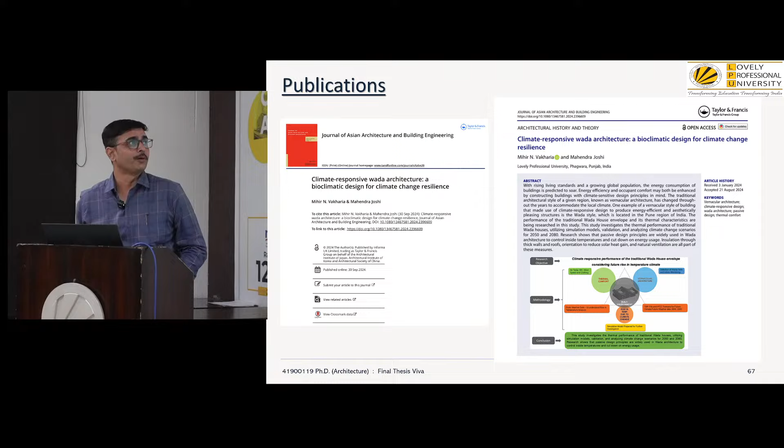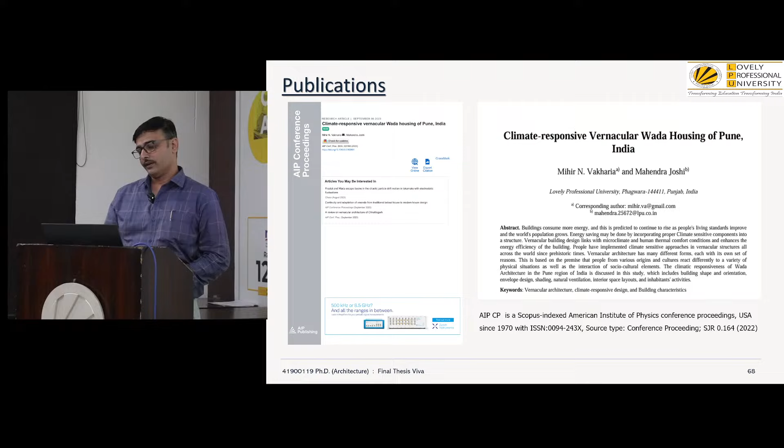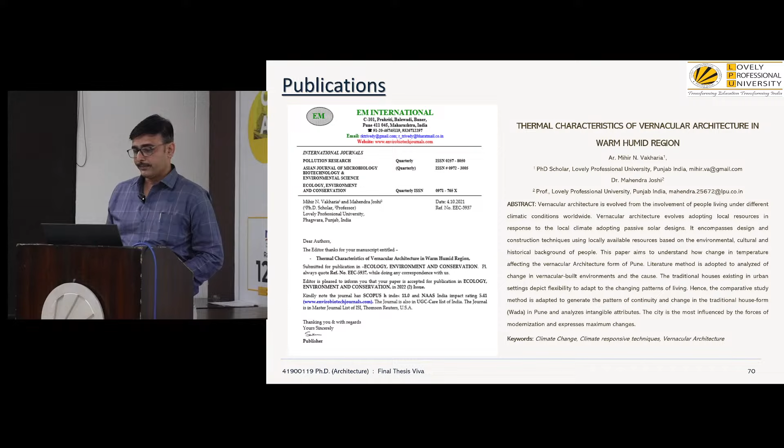So these are the publications. The paper published in Taylor and Francis has all the details for Ranade Wada. This is the climate responsive vernacular Wada housing for India, published in AIP, which is also a Scopus Indexed conference proceeding. One paper is published in a UGC listed journal, and one paper is published in a Web of Science Indexed journal. This journal earlier was Scopus Indexed, but by the time it was published, it was no longer in Scopus Index.

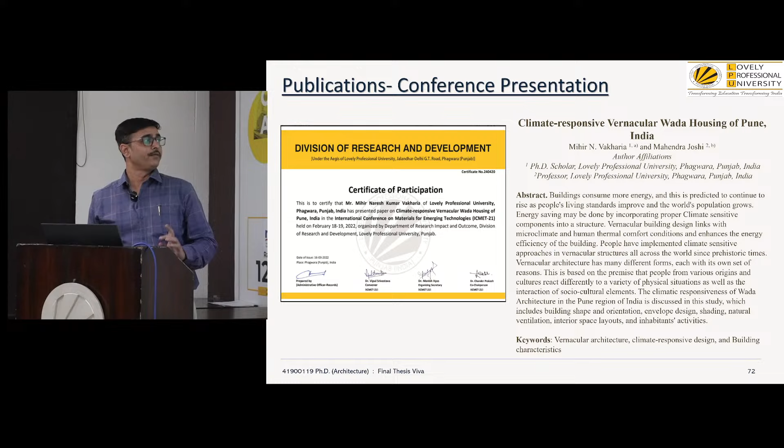So this is the journal paper. These are two conferences: the first one we attended was hosted by LPU, and the second was hosted by Symbiosis. These are the references used for this particular PPT.

Acknowledgement: I extend my heartfelt gratitude to late Dr. Mahendra Joshi sir and Dr. Ramendra Kaur madam for their unwavering guidance and patience throughout my study. Sincere thanks also to Dr. Atul Singla sir for making the study more challenging and interesting by adding more details in terms of Wada justification.

I would also like to acknowledge the owners of Ranade Wada, Gokhale Wada and Purandar Wada for allowing us to document their Wada and place the loggers. While placing the loggers, it became difficult for them too since they didn't know about this equipment, so we had to earn their confidence, and they then gave us permission.

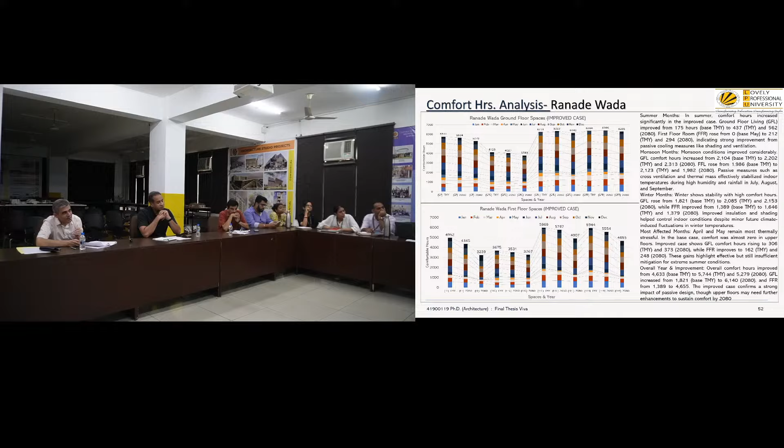When we went into detail, we found we need to understand that we don't just want to simulate the buildings, we want to study the actual scenarios and get real-time data. To get real-time data and discuss with the people, time was the main constraint. Second, and most important, we got the idea that we have to consider the typologies to understand the impact of climate change on smaller wadas, medium-sized wadas, and large-sized wadas. On this basis, in discussion with the guide and under her guidance, we decided to go with three typologies.

Can you go to slide number 31? So... yes sir.

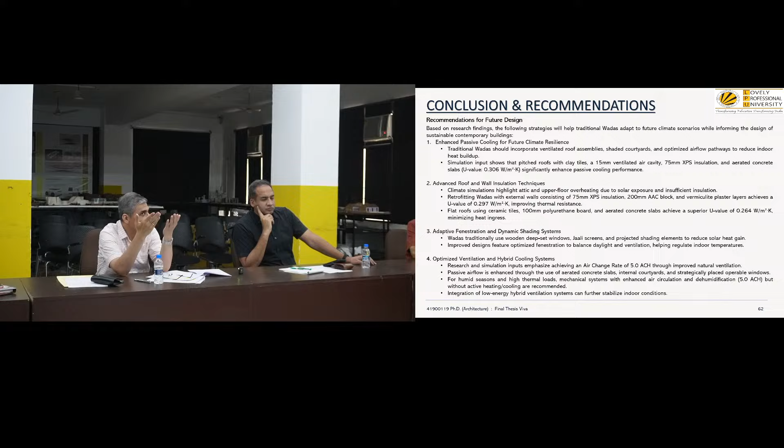Sir, actually, when we go for the air change hours, we have improved the shading strategy for that particular time. In the simulation model we have adopted the strategy where when we get comfortable hours, the window is going to open.

My question is that this thing is not reflecting in your study, but is coming in your conclusions. My question is very specific, sir. We have improved the air change hour on the basis of that only, sir.

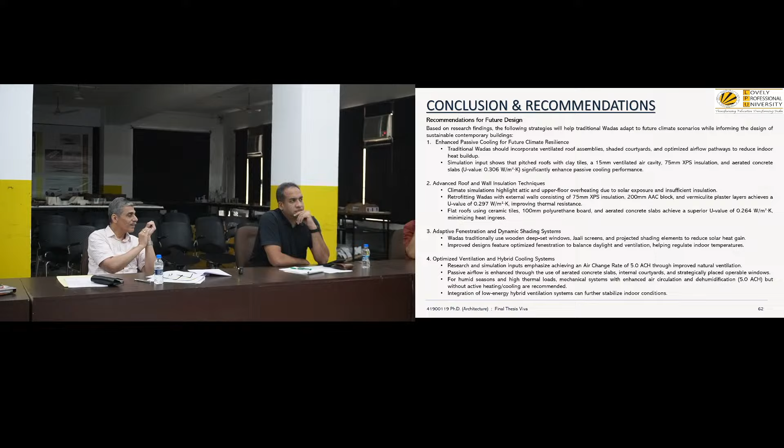Okay, but it should have been reflected in your study. Whatever is in the conclusion should be there in your study in the backdrop, because fenestration and low and high pressure areas, how the cross ventilation happens, that things should be there.

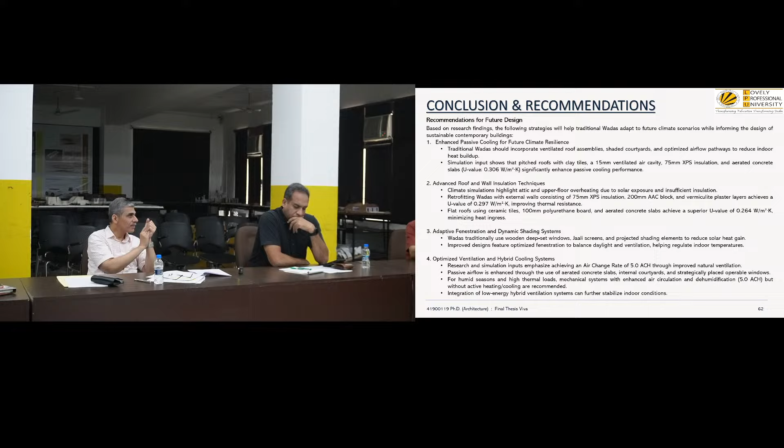So let us come to the questions. Before that, Atul sir wants to say any comments? You can finish off the file, take other questions. So should we start with the questions of examiners? Sure.

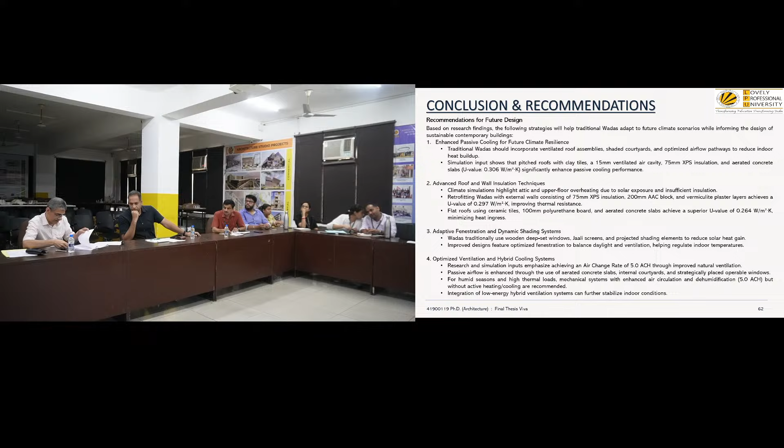The second examiner has said he will just check whether his above comments have been incorporated or not in the second report. He asked questions. I am asking the questions of the second examiner. I have just picked one or two questions that I feel are relevant.

His specific question was, how on ground can the different types of Wadas be retrofitted? Sir, can you repeat the question please? How on ground can the different types of Wadas be retrofitted?

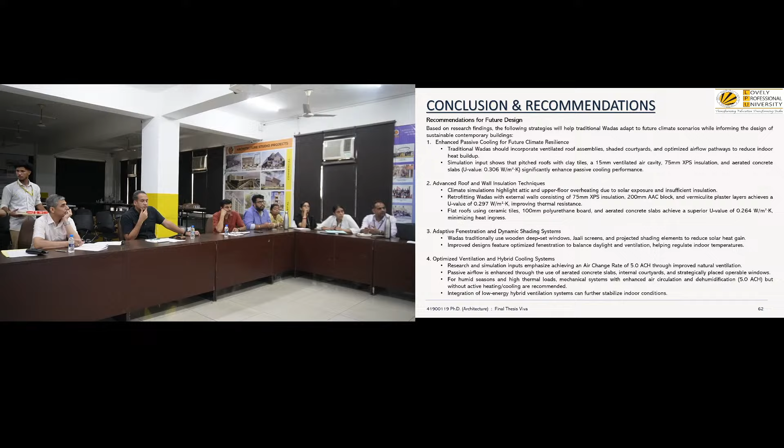Sir, while discussing with the owners, we discussed this point also. The generation which was staying over there, the younger generations don't want to live in this particular Wada. They have some constraints with room areas, privacy and those, but the major constraint was the maintenance issue with the Wadas. The material which was constructed 100 years back is now not available.

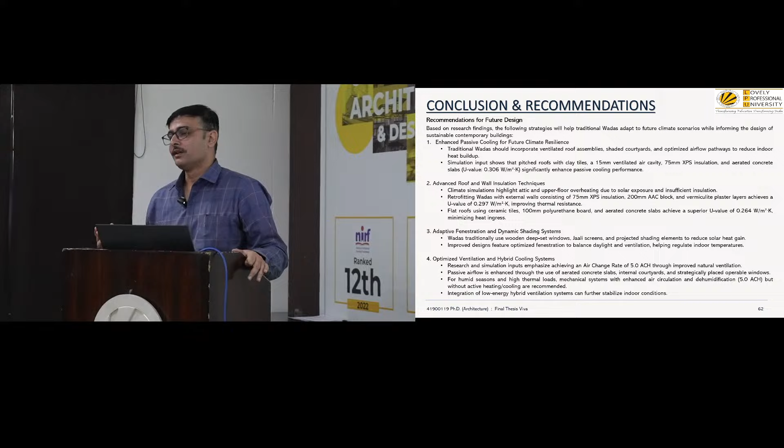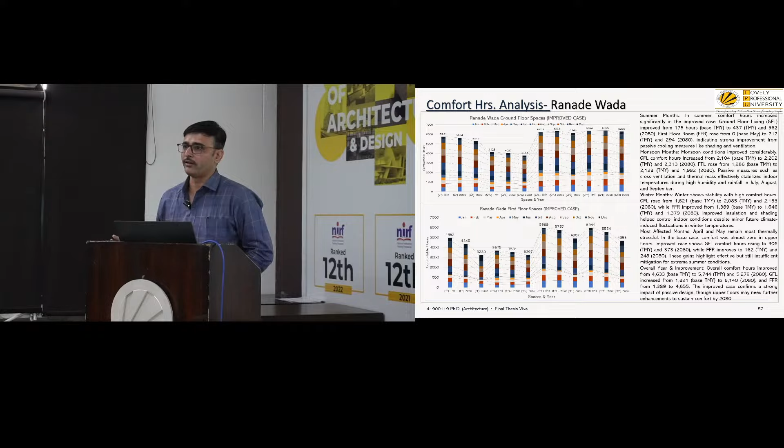They don't have the workmanship. So when we discussed this point, are they willing to go for retrofitting in terms of material improvisation? They said yes, but at the same time they don't want to change the character of the vernacular house form. While discussing with conservation architects, Professor Vaishali Latkar and my director Dr. Gauri Shiurkar, the conservation architects can help us deal with those strategies, and we can place this as retrofitting strategies for the vernacular house, because conservation architects can give us more detailed ideas about how to convince these people, since they are dealing with these scenarios only, sir.

His continuity in this question is: what you are saying is architectural solutions do not translate to actually implementable solutions on the ground. Then the purpose of the research is not fully met with.